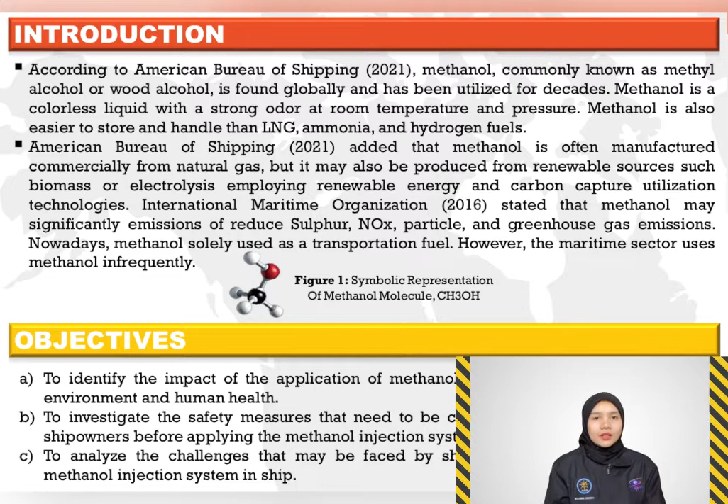International Maritime Organization 2016 states that methanol may significantly reduce emissions of sulfur, NOx, particles, and greenhouse gas. Methanol is solely used as a transportation fuel. However, the maritime sector uses it infrequently.

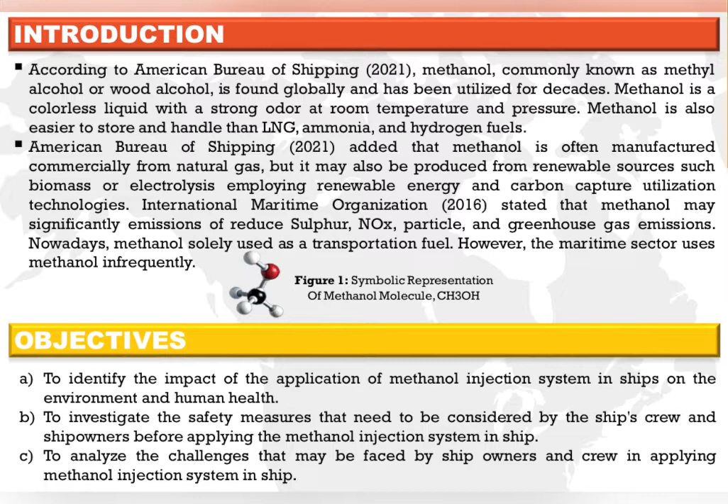The objective is to identify the impact of the application of methanol injection system in ships on the environment and human health. Second, to investigate the safety measures that need to be considered by the ship's crew and ship owners before applying the methanol injection system in ship. And lastly, to analyze the challenges that may be faced by ship owners and crew in applying methanol injection system in ship.

The background of the topic methanol is LCA, involving the discharge process from raw material extraction, fuel production, transportation and storage, bunkering, and finally on board. Environmental assessment of methanol use as ship fuel indicates methanol produced with natural gas has higher GHG emissions than conventional fuels, and methanol produced from biomass has the potential to significantly reduce emissions, provided the electrical energy used in the process is relatively clean.

Evaluation of the readiness of methanol technology as a fuel indicates methanol fuel systems consist mostly of well-known components that involve individual components are technologically mature. Next, it's requiring such mature technology as has been used in the maritime industry.

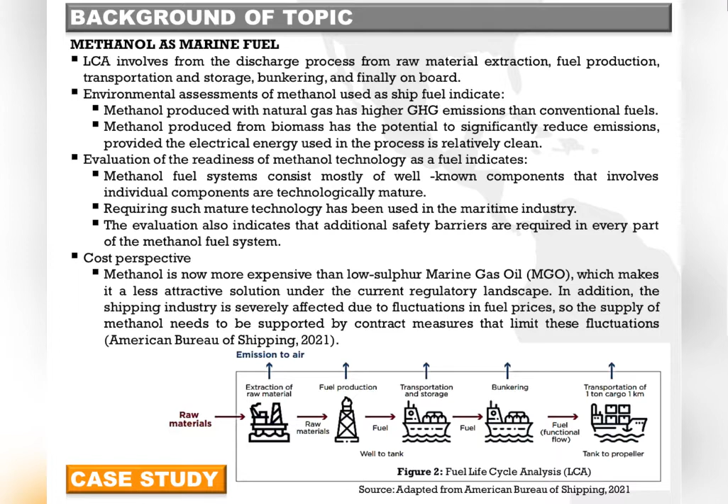Lastly, cost perspective. According to American Bureau of Shipping 2021, methanol is now more expensive than low sulfur marine gas oil (MGO), which makes it a less attractive solution under the current regulatory landscape. In addition, the shipping industry is severely affected due to fluctuations in fuel prices, so the supply of methanol needs to be supported by contract measures that limit these fluctuations. That's all. Thank you.

Thank you to my friend Najwa Izzati. I will continue the next presentation. It's about case study related to fuel cell, methanol fuel cell. So, AIDAnova methanol fuel cell test.

Methanol fuel cell will be tested on board the AIDAnova cruise ships in 2021 to investigate the integration, efficiency, and operability of this fuel cell in relation to low emission natural gas (NG) and battery generation options.

So the fuel cells to be installed, designed and tested by the Freudenberg Sealing Technologies have been tested at offshore facility and are proven to have long lifespan of up to 35,000 hours of operations. So the test is also important basically to investigate the development of related energy networks, energy management, and the ecological and economic impact of the methanol fuel cell system.

Second case study is about HyMethShip, where a European consortium of 13 members has been working since 2018 for the purpose of developing a robust methanol vessel derived from the renewable energy.

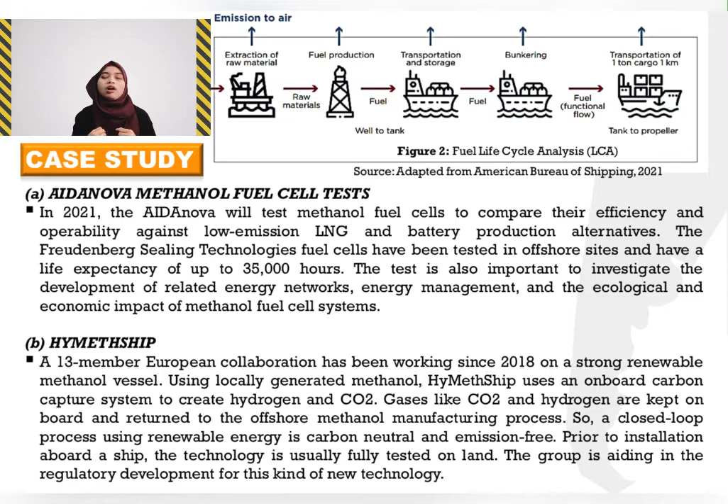Okay, next I will continue the next presentation about level of awareness. In terms of level of awareness, there are the evolutions of safety concepts in shipping. We'll cover level of awareness, which is discovering, learning, understanding, and also developing.

For discovering, the IMO actively calls on its member countries to reduce greenhouse gas emissions, GHG emissions, especially those involving the maritime industry, including transportation by sea. This is because high GHG greenhouse gas emissions have a negative impact on the environment and directly contribute to human health problems.

Under discovering level also, greenhouse gas emissions also lead to significant climate change, leading to natural disasters. Natural disasters cause many losses, threaten human health and safety, and even loss of life.

Second level awareness is about learning. So greener shipping fuel has been identified as an alternative to reduce GHG emission from the maritime industry. This has led to the introduction of methanol as a more environmentally friendly and effective marine fuel alternative when compared to other marine fuel alternatives such as natural gas (NG) and liquefied petroleum gas (LPG).

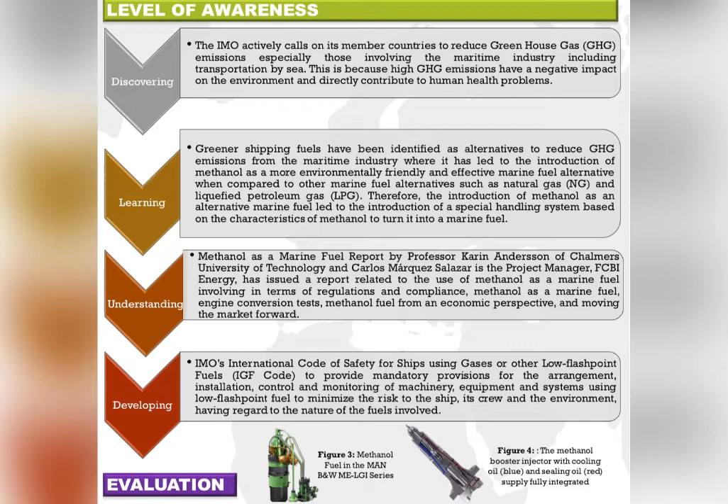IMO, the International Maritime Organization, has the International Code of Safety for Ships Using Gases or Other Low Flash Point Fuels (IGF Code) to provide mandatory provisions for the arrangement, installation, control, and monitoring of machinery, equipment, and systems using low flash point fuel to minimize the risk to the ship, its crew, and the environment, having regard to the nature of the fuel.

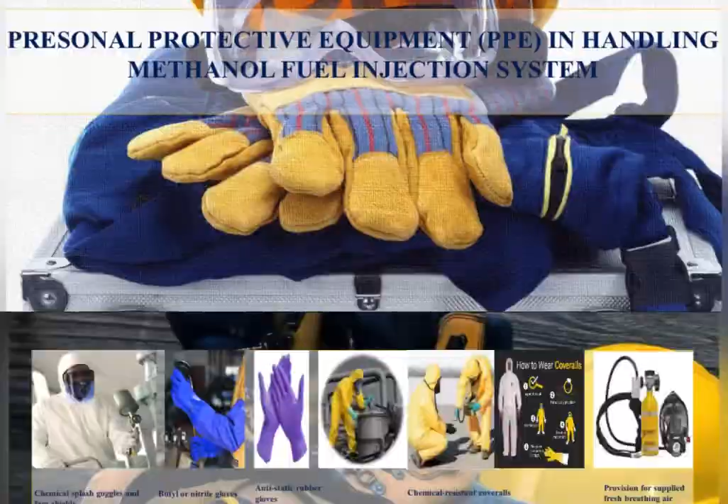Personal protective equipment (PPE) when handling methanol may include but is not limited to chemical splash goggles and face shield, butyl or nitrile gloves, anti-static rubber gloves, chemical resistant coveralls, provision for supplied fresh breathing air, multiple fire extinguishers, industrial first aid kits, water showers and eye wash stations, and lastly, a supply of potable water for washing and drinking.

A risk analysis plan will be developed, reducing risks that cannot be eliminated and documenting the process. Loss of function, component damage, fire, explosion, and electric shock are all considered risks. In order to demonstrate an equivalent level of safety, the design must be complex and deviate from the prescriptive arrangement. Hazard identification, hazard and operability study, and FMEA provide valuable design recommendations.

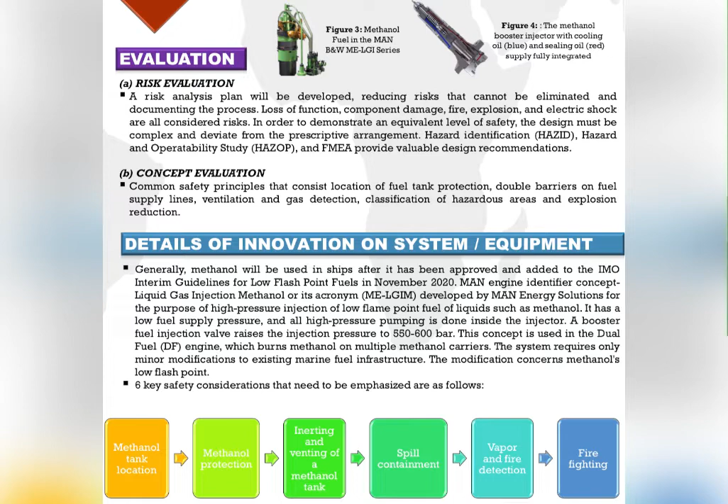Common safety principles consist of location of fuel tank protection, double barriers on the fuel supply line, ventilation and gas detection, classification of hazardous areas, and explosion reduction. Generally, methanol will be used in ships after it has been approved and added to the IMO interim guidelines for low flash point fuels in November 2020.

For this purpose, liquid gas injection methanol has been developed for high pressure injection of low flash point liquid fuels such as methanol. It has a low fuel supply pressure and all high pressure pumping is done inside the injector. A booster fuel injection valve raises the injection pressure to 550 to 600 bar. This concept is used in the dual fuel engine which burns methanol on multiple methanol carriers.

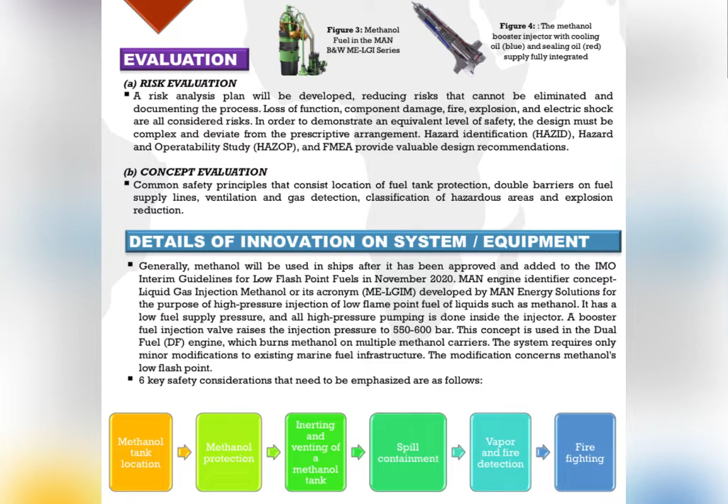The system requires only minor modification to existing marine fuel infrastructure. The modification concerns methanol's low flash point. There are six key safety considerations that need to be emphasized as follows. First, methanol tank location. Next, methanol protection. Inerting and venting of a methanol tank, spill containment, vapor and fire detection, and lastly, firefighting.

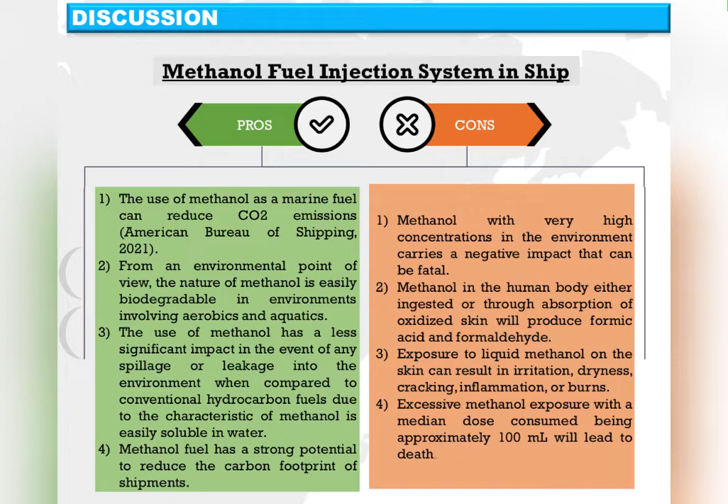In terms of disadvantages, methanol with very high concentration in the environment carries a negative impact that can be fatal. Methanol in the human body, either ingested or through absorption through the skin, will produce formic acid and formaldehyde. Exposure to liquid methanol on the skin can result in irritation, dryness, cracking, inflammation, or burns. Excessive methanol exposure with a median dose consumed of approximately 100 milliliters will lead to death.

In conclusion, methanol has been recognized as a future carbon neutral fuel if generated using biomass or biogas and renewable power. Directly, the manufacture of methanol from renewable biomass or biogas and power may help the IMO achieve decarbonization and reduce GHG emissions. Overall, methanol distribution and engine availability lag behind natural gas, but the experience of large commercial ships suggests that methanol is a credible rival for future marine fuels.

The development of new safety systems and procedures is based on the suitability of methanol and methanol mixture characteristics identified in the risk assessment and concept. Availability of methanol technology, safety equipment for handling methanol, and availability of methanol as a marine fuel need to be considered. Methanol is currently more costly than low sulfur marine gas oil or MGO.

The higher price of methanol reduces demand for methanol as a marine fuel, making this a less attractive alternative under the existing regulatory environment. Fuel price fluctuation also harms the shipping industry. Therefore, methanol supply must be supported by contracts that limit price fluctuation.